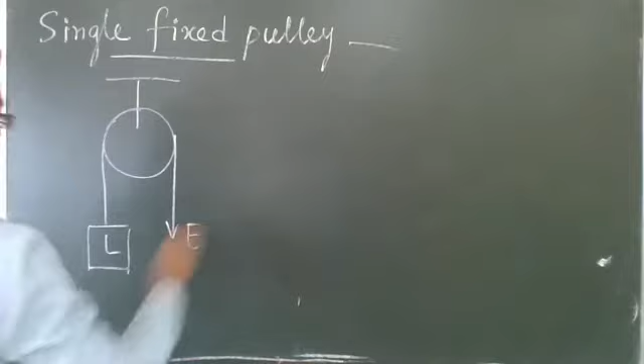Velocity ratio and mechanical advantage will be the same, that is 1. And when will they be equal? When it is ideal: single fixed pulley. Single fixed pulley. So on this side load is there, and on the other side effort is there. Okay. So I told that here there will be some tension, and the same tension will come to the other side because there is no friction.

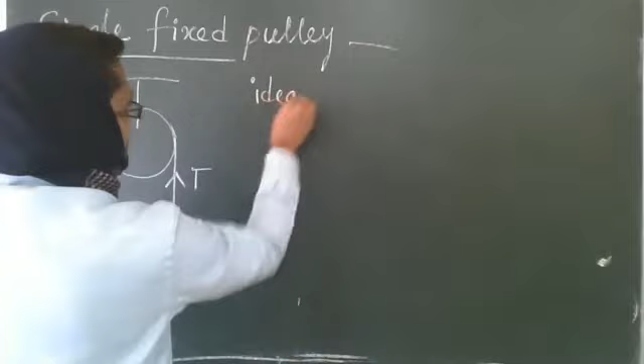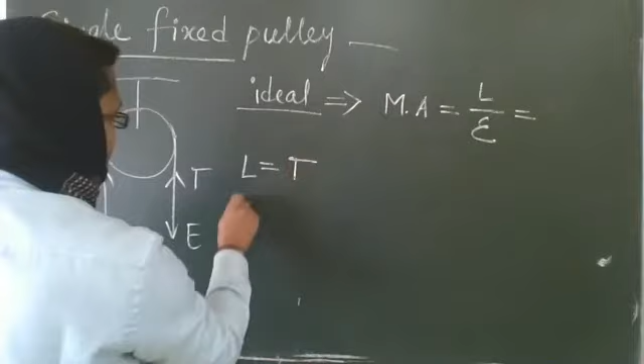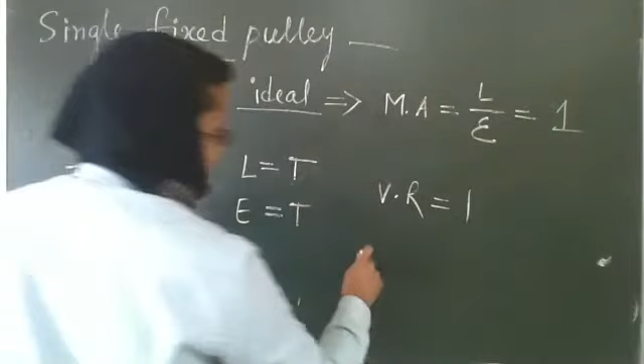For the ideal case, mechanical advantage will be equal to load by effort, and here load and effort both are equal. Load will be balanced by T, the tension. Effort will also be balanced by tension because there is no friction, and it will be 1. For the ideal case, velocity ratio will also be 1. But if it is not ideal, then velocity ratio will remain the same, 1, but mechanical advantage will be less than 1.

If you are asked that the displacement of the load point is 2 centimeters, what will be the displacement of the effort point? That will also be 2 centimeters because velocity ratio will be 1. Okay. Clear?

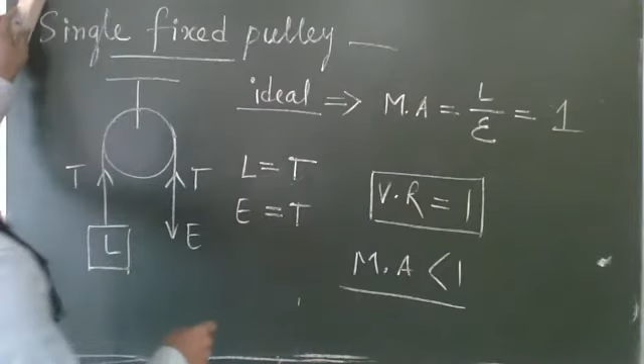Yes, sir. Okay. Now come to the single movable pulley. In a single movable pulley, what will happen? The axle, or the axis about which the pulley is rotating, that axis will also move. It will go up, it will go down. Okay. So single movable pulley. Here one side it is fixed. Here one pulley is there. And on the other side we'll put some effort, and here one load is there. So this is a single movable pulley.

When we apply effort, then this pulley will also go up. That means if this pulley is not massless, then we have to apply an amount of force which will bring both the load and this pulley up. Excuse me, sir. How can the pulley be massless? Yeah, it is the ideal case. In the ideal case, we take this pulley massless, but in the real case, there is mass. For that reason, mechanical advantage will be less.

Sir, is the ideal case real, or is it fiction? Means it is not there in real? In the ideal case, there is no friction, there is no mass of this pulley. In the real case, friction is there and the mass of the pulley is also there. Sir, my question is, does this ideal case exist in the real world or not? No, you all know that an ideal thing does not exist. We just assume it to make the calculation easy. That's what I was asking. Okay. So ideal does not exist.

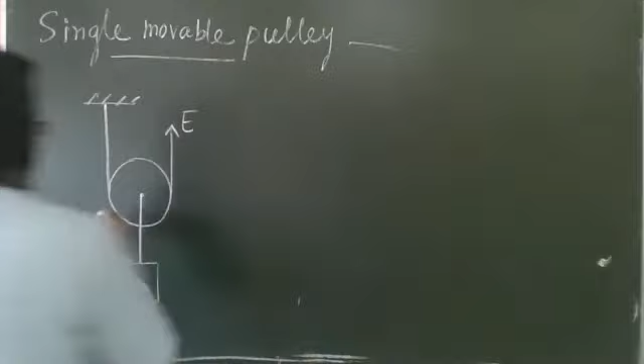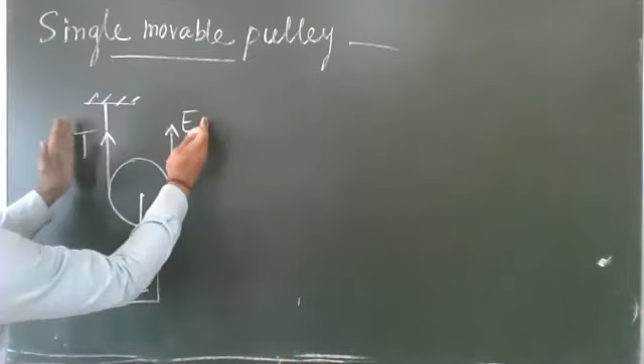So here when we apply some effort, again the same thing, one tension will act in the opposite direction. And the same tension will go to the other side of the string, in the opposite direction, T. Now this tension and this effort, which will be equal to tension, these two forces will bring the load up. So here the load is balanced by two equal forces, because there is no friction. So load will be equal to 2T.

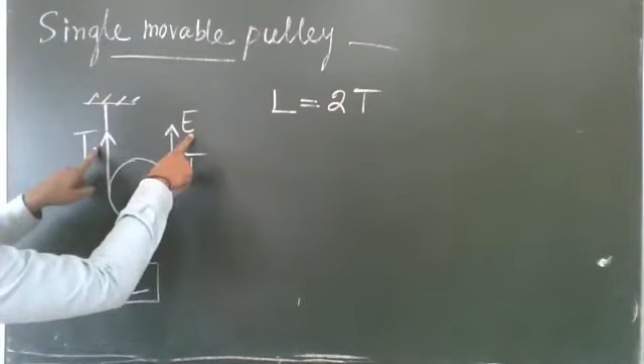Is it okay or not? Sir, once again, repeat it. This effort and this tension are in the upward direction. These two things will bring the load up. So we can write that load equals tension plus effort. But effort is equal to tension here. When we put some effort, one tension will be generated in that string, and they will be equal. Effort and tension will always be equal. And this tension will go to the other side with the same amount when there is no friction. So in the ideal case, load will be equal to this tension plus effort. Clear?

Sir, how is this tension becoming equal to effort? Tension, I told, comes from elasticity. Like a spring, if you put some force on the spring and release it, the spring will go back. Because of what? Because there is some internal force. This tension is the internal force which comes inside the string when we pull or put some effort on one end.

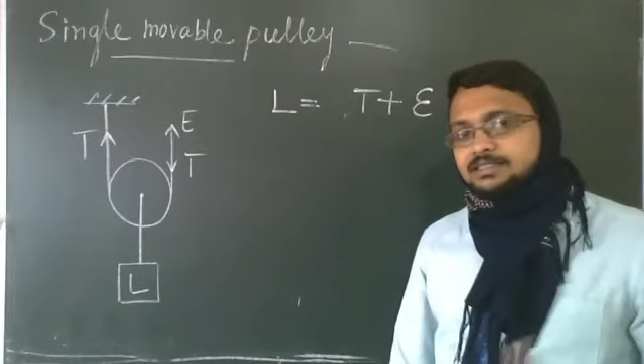Sir, there is no exception? Is tension always equal to effort? Tension will be equal to effort. In class 11, we also do some numericals. There also we will take tension equal to effort. Okay.

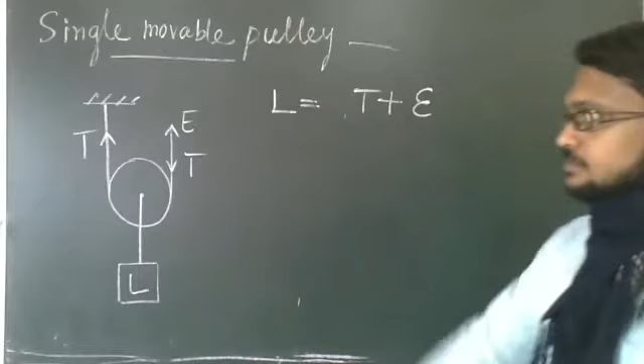Okay. Yes, sir. And this tension, there is an exception for this one because it is coming over the pulley. If the pulley is frictionless, then this tension will be equal to this one. Otherwise, for this part, there will be some less value. So here load equals tension plus effort, because tension and effort both are taking the load up. Now effort equals tension.

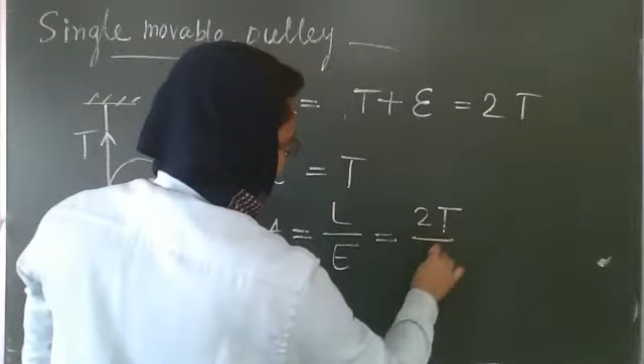Okay, that you understood automatically. Effort is equal to tension. This tension comes inside the string because of elasticity. So load will be 2T. So mechanical advantage, again, this is the ideal case. Mechanical advantage is load by effort, 2T by T. That is 2. Clear? Mechanical advantage is 2. Clear?

Clear? Reply. Yes. Sir, I did not understand. If you could repeat it once again. Load by effort, I do not understand. Yes?

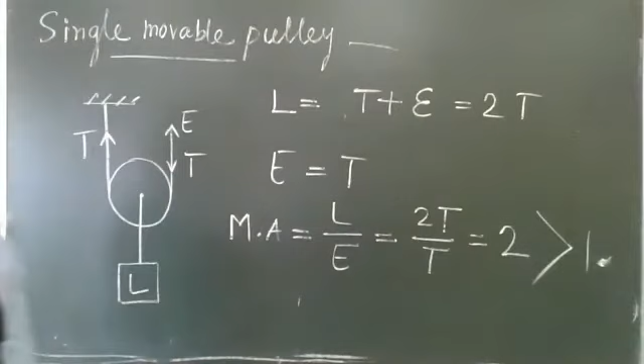Effort equals load by 2. Mechanical advantage is equal to load by effort. Load is 2T, effort is T, that is equal to 2. Okay, greater than 1. So it will act as what? Force multiplier. Mechanical advantage greater than 1. So a single movable pulley acts as a force multiplier. Clear?

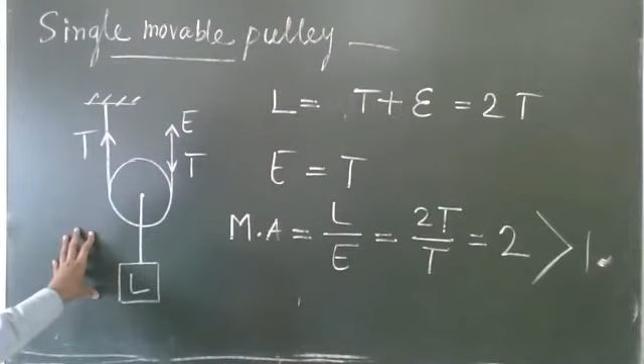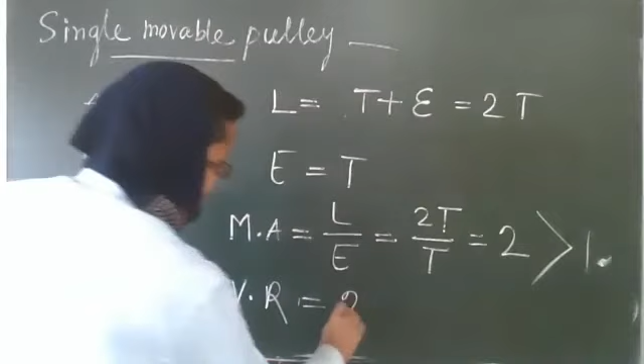Yes, sir. Clear. Now velocity ratio. For the ideal case, velocity ratio is equal to mechanical advantage. This will be 2, and this is 2 always for a single movable pulley. But if it is not ideal, then mechanical advantage will be less than 2. But velocity ratio will remain the same, 2. Okay? Clear?

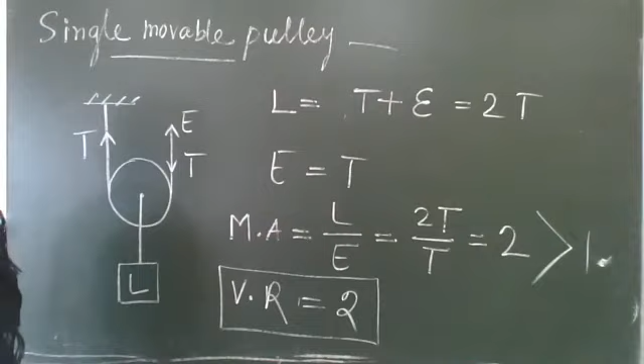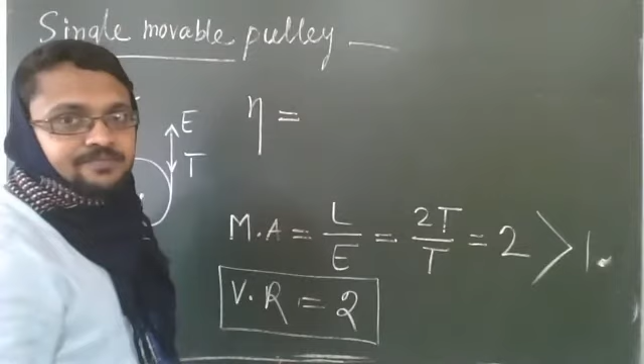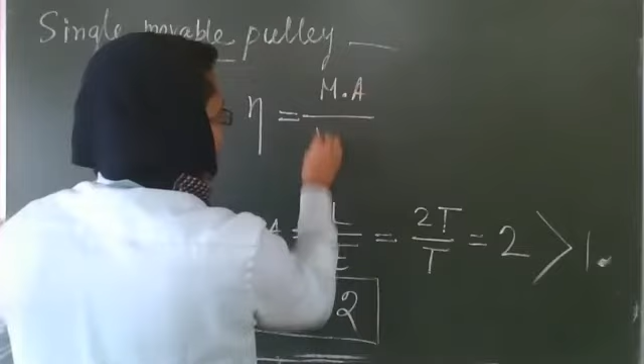Yes, sir. Now come to efficiency. Tell me, what will you get for efficiency? Efficiency, eta. Efficiency equal to what? Load by effort? No, in terms of mechanical advantage and velocity ratio. Mechanical advantage by velocity ratio, MA by VR. MA 2, VR 2, equal to 1.

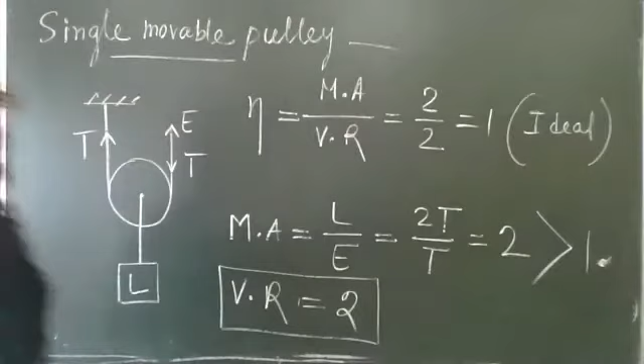Again, this is for ideal, but for an actual single movable pulley, eta will be less than 1. That means mechanical advantage will be less than 2 because of what? Two things again. One is friction in the pulley and the axle. And another point is we have to take the mass of the pulley also up. So there is some mass of the pulley.

Sir, if we are applying the force to pull that pulley also up, then how will it act as a force multiplier? This is a practical question: we are applying the force to move that pulley up and that weight also up. Then how is that machine acting as a force multiplier?

Using this thing, we can take more mass up. Whatever effort you are applying, you can take a weight up more than the effort. For that reason, it is a force multiplier. Oh, okay, sir. We are applying a small amount of effort, but we are picking up more weight. More weight means what? Force multiplier. Okay, sir.

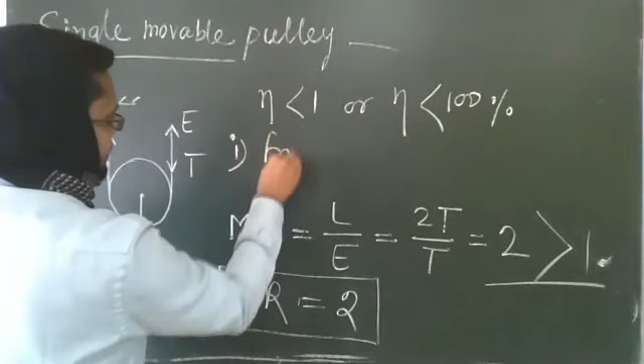So these are the few things. Velocity ratio equals 2 in the case of a single movable pulley. You can get numericals, and remember those 2 points. Why, in a real or actual single movable pulley, is eta less than 1 or less than 100%? Two points. One is friction present in the pulley and axle, and second, we have to pick the weight of the pulley in the upward direction.

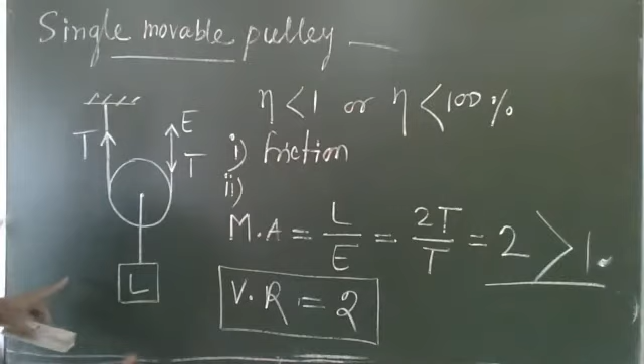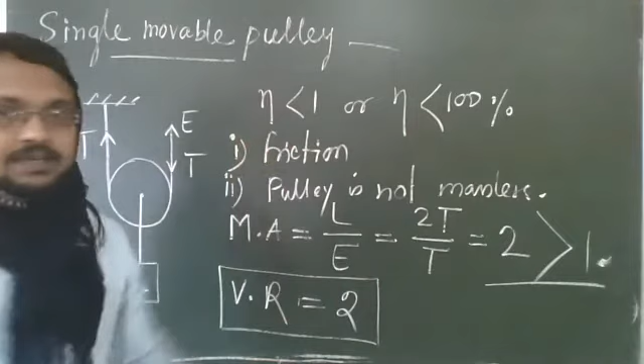Okay, the pulley is not massless. Pulley is not massless means we have to take the pulley and load both up. For that reason, eta will be less than 1. Okay, these are the 2 main points. After that, you will convert it into a sentence. Okay, fine.

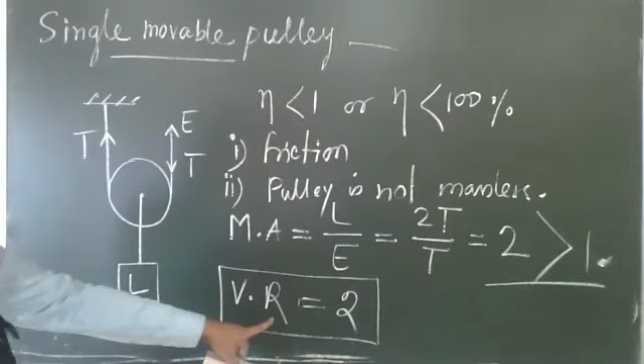Yes. Now you can get numericals from velocity ratio, mainly from velocity ratio. Mechanical advantage also you can get. Okay, I am giving. So when it is mentioned single movable pulley, you will automatically understand that velocity ratio equals 2.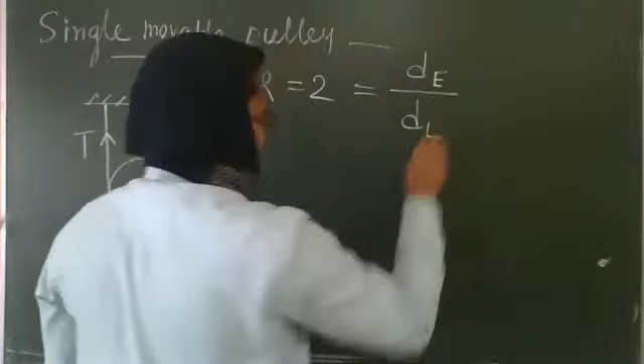Velocity ratio means what? Velocity ratio means the number of pulleys, in terms of displacement: distance moved by the effort by distance moved by the load, DE by DL. So DE by DL, okay.

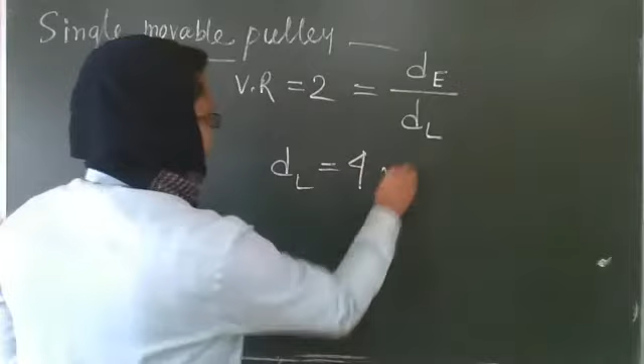Suppose it is given the load point is moving by a distance. Suppose DL is given, 4 meter. What will be the displacement of the effort point? You can find it. DL is 4, so it will be 8 meter. Don't forget to write the unit. 8 meter.

One example of this kind of pulley is in some big shops. You have seen, I hope, there is a shutter in front of the door, and beside that shutter there is a chain. They pull that chain quick, and the shutter goes up slowly. Yes, sir, I've seen. They use one handle also to rotate, and the shutter goes up slowly.

That means the load is moving slowly, but the effort point is coming down very fast. DE is more than DL in that case. For that reason, we can pick up the heavy shutter easily. Understood? Yes, sir.

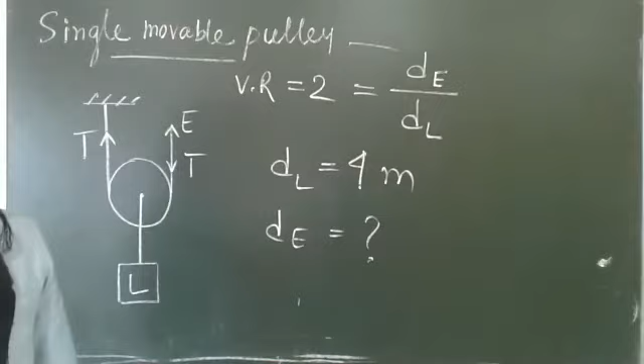Means the effort is acting more on the body, sir? Like due to the pulley, the effort is becoming more? Due to the pulley, effort is not more. We pull it easily; we are not putting too much effort. Oh, the effort becomes less. The effort point displacement is more. Oh, okay.

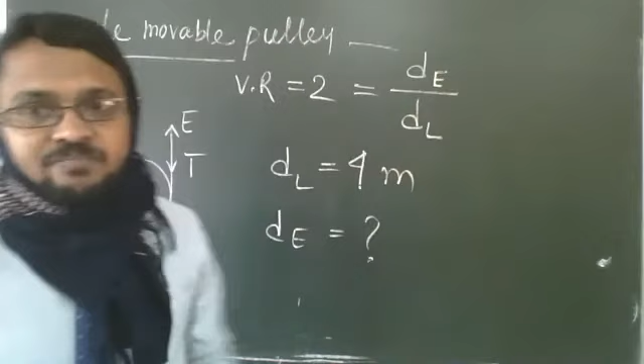Mechanical advantage equals load by effort. We are taking a heavy load by putting a small amount of effort, and we pick the heavy shutter up. One pulley is there inside that shutter. Clear? Okay, sir.

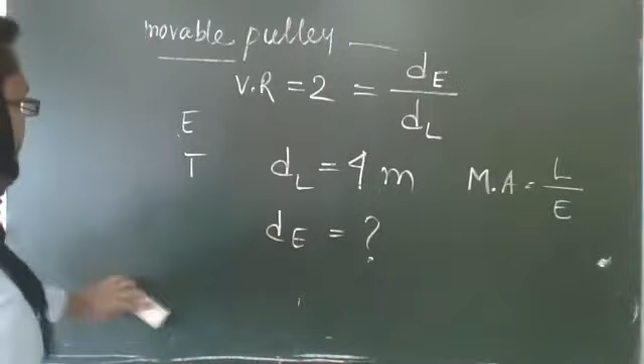Next I am going to the last part, the block and tackle system: how to draw a diagram, how to find velocity ratio, then mechanical advantage, efficiency, load, effort. So here we will see using an example. Suppose three pulleys are there, and you are asked to draw the block and tackle system.

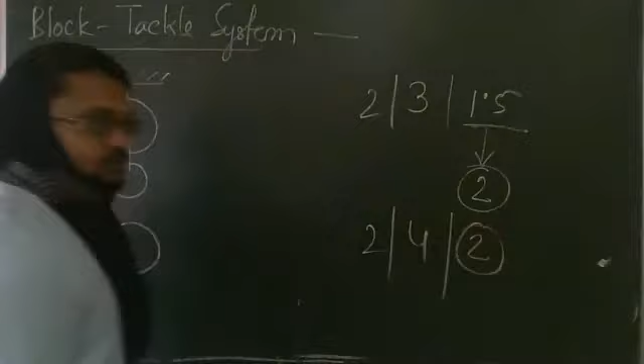How to draw? 3 means you will divide in 2 equal parts and get 1.5. Then you take the next whole number, that is 2. So 2 pulleys will be in the upper part and 1 pulley in the lower part. More pulleys will be in the upper part. If it is 4, dividing equally gives a whole number, 2, so 2 in the upper part and 2 in the lower part.

Now how to put the string? From here you will start, then it will go down, then go up like this, and here it will end. This will be the load, this will be the effort, and this is tension here. Sir, that down string is attached to the down pulley? Yes, this one goes this way, then down, up, then into the down pulley.

The hook will be touched here. 2 hooks are there, one with the down pulley, another with the upper pulley, but here we attach the string to the down one, not the upper. This string will take this pulley up. Okay, sir. So here how many tensions? 3 tensions will be there for the load: this, this, and this.

Because of what? This tension will be balanced by effort. And these 3 tensions, this, this, and this, in the 3 strings. One is here, another is here, and another is here. 3 tensions. These 3 tensions will take the load up. So load means 3T. And effort means T.

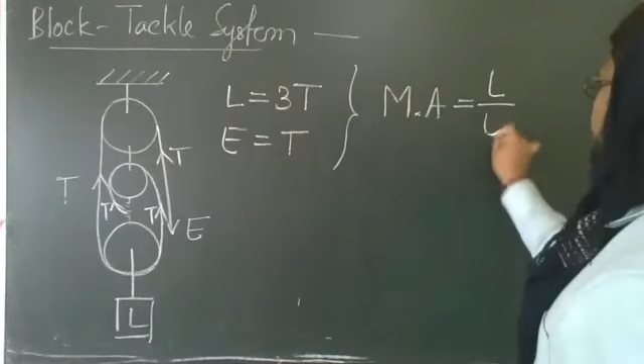This is for the ideal case. For that reason, the same amount of tension is transferring to each point in the string. From this, mechanical advantage for the ideal case, again and again I am telling, mechanical advantage is load by effort, 3T by T, that will be 3. For the ideal case, velocity ratio equal to mechanical advantage equal to 3.

Now, if this diagram is given and VR is not given, then how to write VR? If this diagram is given, then VR is equal to, this is only true for VR, number of these pulleys. Here number of pulleys is 3. So VR will be 3. This is only true for VR, not for MA. MA is 3 because it is an ideal machine.

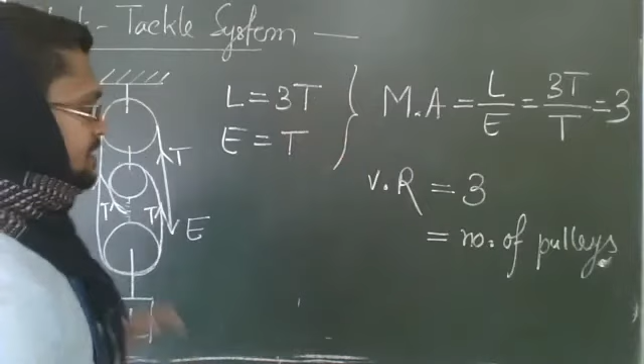If it is not an ideal machine, then MA will be less than VR. This is 3 for the ideal case. MA less than VR is for the actual case or non-ideal case or real case. Sir, if it is an ideal pulley, then we can write MA is equal to number of pulleys. Yes, if it is ideal. Otherwise, VR is always equal to number of pulleys. And MA equals VR when it is ideal, and MA will be less than VR if it is not ideal. Clear?

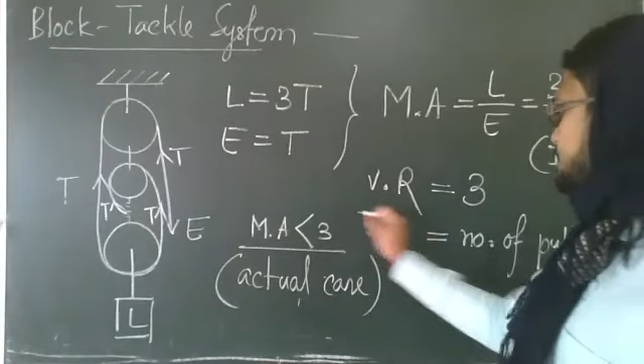Okay, sir. Now you can get this kind of question. Suppose VR is given, diagram is not given. From the VR, you will understand how many pulleys there will be. If VR is given as 3, you will understand that there are 3 pulleys. After that, you will be asked to draw the block and tackle system using 3 pulleys. After that, suppose efficiency of the machine is given, suppose efficiency equal to 0.8 or 80%.

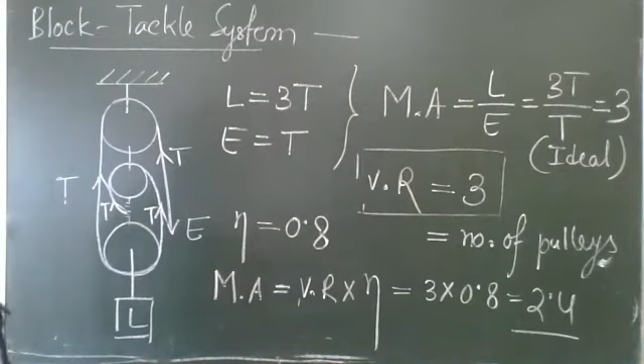And now how to find MA? MA is equal to VR into eta. That is 3 into 0.8, right? Sir, efficiency will be given? Efficiency will be given, otherwise how to find MA if it is not ideal. If it is mentioned that the block and tackle system is ideal, then only you can write MA equal to VR, otherwise you cannot write. Understood? Okay, sir.

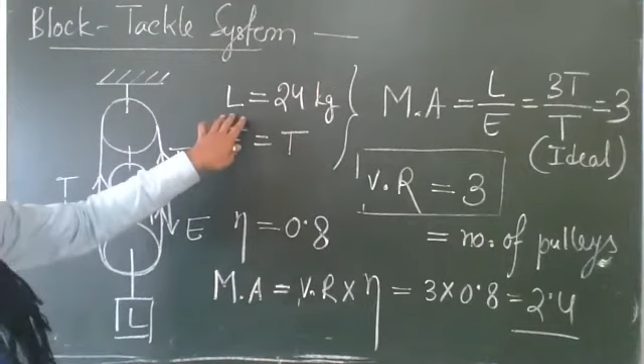Now you are getting MA 2.4. After that, suppose load is given. Then how much effort will be applied to pick the load up? MA equals load by effort. Suppose load is 24 Newton. Sometimes you will get load given as 24 kg. How much effort will be applied to pick a 24 kg load up? Then you will understand that this is 24 kgf. Load is force, so the unit will be Newton or kgf.

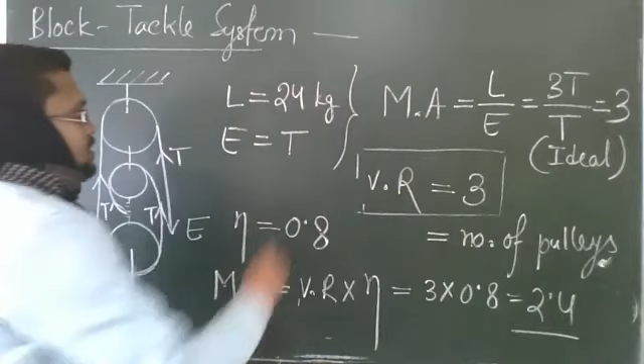So how much effort will be applied? Mechanical advantage is this, load is this. Put the values here. Mechanical advantage 2.4 equal to load 24 by effort. So effort equals 24 by 2.4. So it will be 10 Newton. Understood?

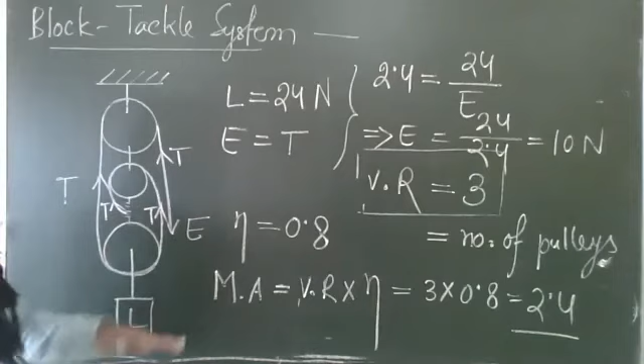I didn't understand, sir. Could you please explain it once more? I didn't understand the last part. Okay, I'm doing it from the beginning using 3 pulleys. Okay.

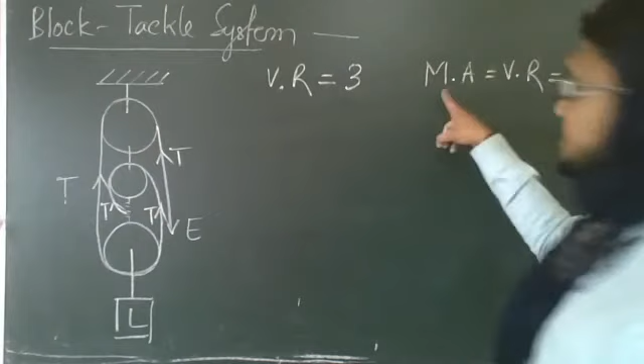I'm doing it step by step again. Okay, sir. You can get this kind of question. Diagram is given. If diagram is given using 3 pulleys, then first of all you will understand VR equal to 3. Next thing, if in question it is mentioned that it is ideal machine, then you will take that MA equal to VR equal to 3. Otherwise, you will not take this one. If it is mentioned ideal, then only you will take.

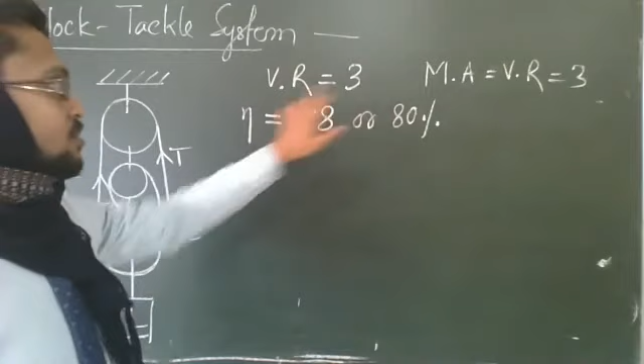Next, if it is not ideal, then in question one more value will be given, that is efficiency. Suppose efficiency is given here 0.8, or you can get it this way, 80%. 80% means 0.8, 80 by 100. In any way, eta equal to 0.8 will be given. VR is 3. When you are seeing eta equal to 0.8, you will automatically understand that the machine is not ideal, because eta is less than 1.

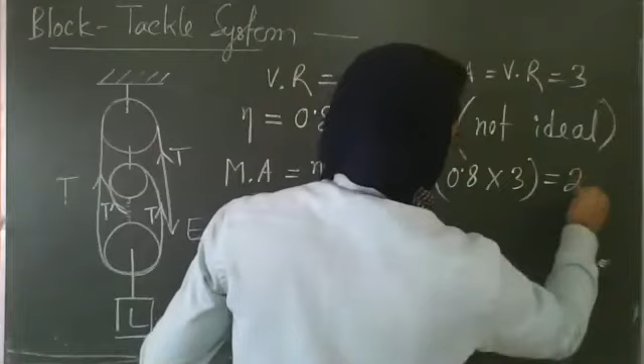Now how to find MA? If VR will not be given, if the diagram is given, eta will be given. Then MA equal to eta into VR. The formula is there, eta equal to MA by VR, that we had done yesterday. Now eta is 0.8 into 3, you will get 2.4. This is MA. Clear?

After that, suppose value of load is given. How much? 24 Newton. You are asked what will be the effort to pick this load up. So mechanical advantage equal to load by effort. You all know now. Now load is 24 by effort. So effort will be 24 by 2.4 Newton, that is 10 Newton. Understood now? Yes, sir, I understood properly.

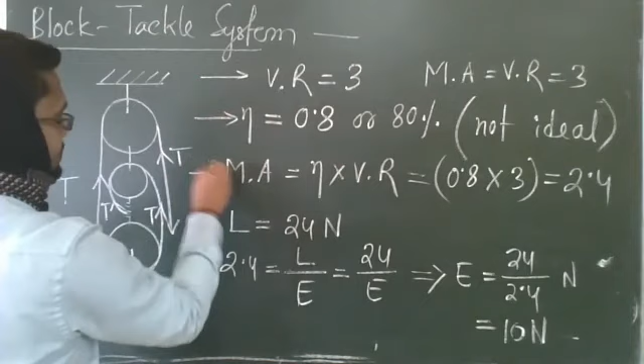Yes, these are different steps. So sequentially you will go. If the diagram is given, velocity ratio will not be given. If velocity ratio is given, then diagram will not be given, and you will be asked to draw the block and tackle system. So if velocity ratio is 3, you will understand that there are 3 pulleys. Clear?

Sir, if diagram is given, we just have to check the number of T? Will the number of T be given or do we have to draw it? T means tension, like you did 3T by T, that's how we get the velocity ratio. T will not be given in the diagram, we have to find it ourselves. Yes, 3 pulley means VR is 3. Simple. Oh, we don't have to derive like you did? No. 3 pulley means VR 3. Just single line.

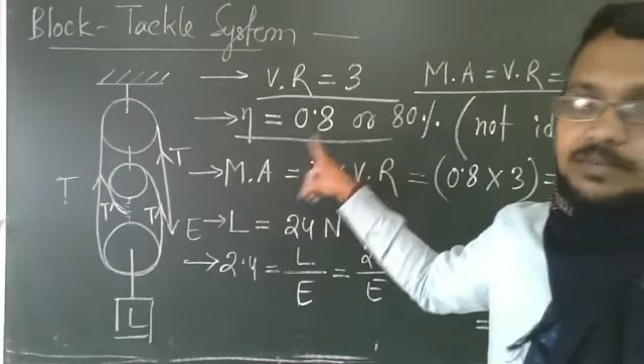Okay, sir. If it is mentioned that the machine is ideal, then mechanical advantage also 3. After that, if eta is given and eta is less than 1, then mechanical advantage should not be equal to 3. Then mechanical advantage equal to eta into VR. Yes, sir. Now properly clear. If it is ideal, then eta equal to 1. If eta is less than 1, mechanical advantage will be eta into VR. So this will be the value.

After that, suppose load value is given, what will be the effort value? Suppose effort value is given, you are asked how much load you can pick up using this block and tackle system. Then the same formula you will use. And one more thing we have to keep in mind, 24 kg is equal to 24 kgf, because load and effort are forces. So when you are writing load by effort, here you will write 24 kgf.

Okay, sir. Here I have taken 24 Newton. If the weight is given 24 kg, then when you are writing load, it will be 24 kgf. And our last answer should be in Newton or in kgf? You can write kgf or Newton. If you want to write it in Newton, multiply it by 10, the value of g. Otherwise, leave it here in kgf. No problem.

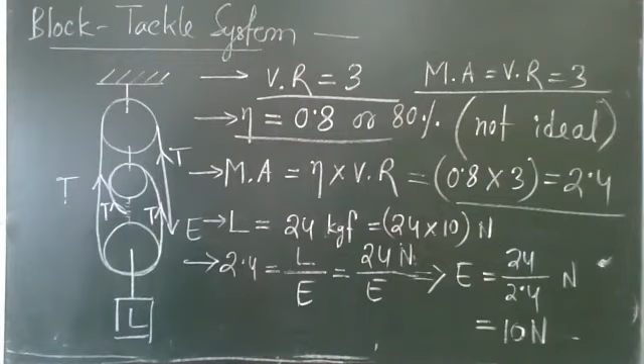Then it should be 100, meaning the last answer, if you multiply it by 10. I have taken kgf here. Initially it was Newton, 24 Newton. The values are different. 24 kgf and 24 Newton are not equal.

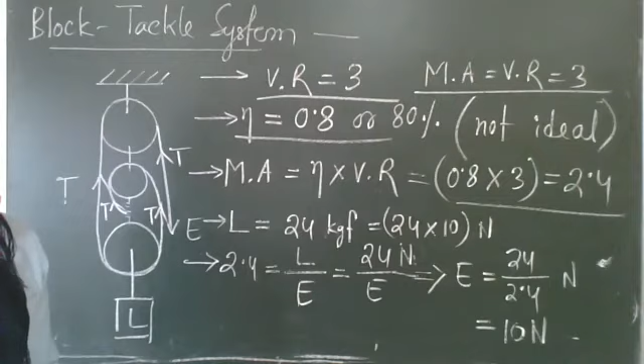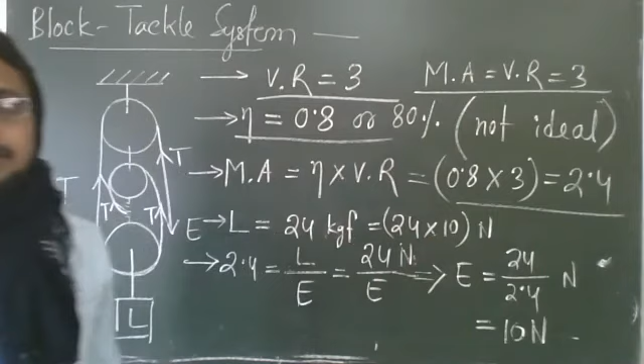Okay. Then how are we taking it? kgf and Newton are units of force, but they are not the same. Oh. Then we are changing kgf to Newton without multiplying by 10. When you are changing kgf into Newton, you have to multiply by 10. We have to multiply it by 10, but there too you have taken 24 only. You didn't do 240 for the previous value.

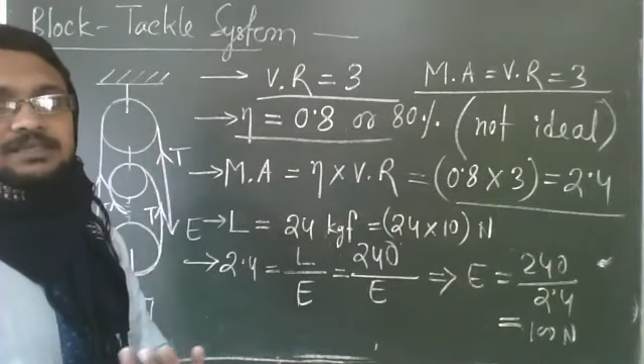Now it will be 100. Initially I had written 24 Newton here. I had not taken kgf. Now I have taken kgf to explain it. Now it will be 240 by 2.4, 100 Newton. Newton and kgf are different things. They are units of force. You have read this in class 9 in the gravitation chapter. Whatever we are taking, that only we have to do.

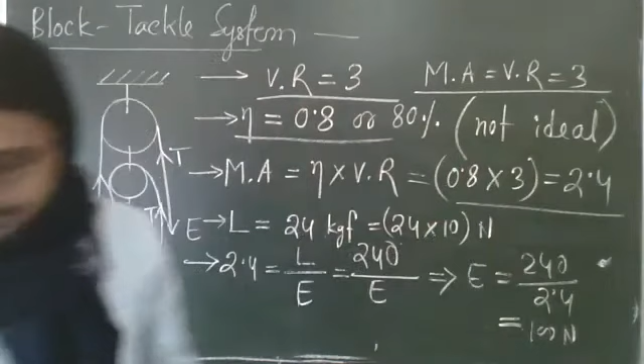Last answer. Okay. 24 kgf, put 24 kg here. If you want to convert it into Newton, convert it by multiplying by 10. Otherwise, simply, load is 24 Newton, find effort, it will be in Newton. Okay, sir. That was one of the problems. Now it's clear. Okay, clear?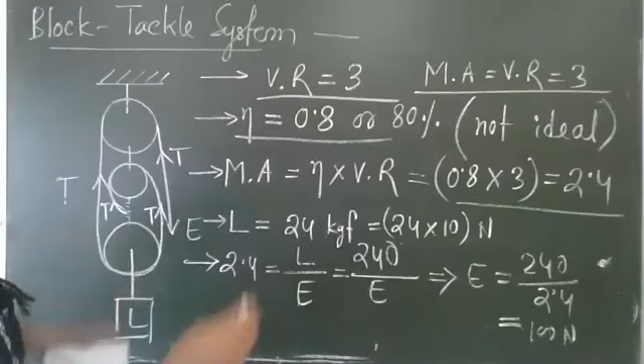You can get a direct short question, like suppose it is given an ideal block and tackle system. So velocity ratio will be 3, mechanical advantage 3. Ideal means mechanical advantage 3. Here again the load is given, suppose 24 Newton. What will be the effort?

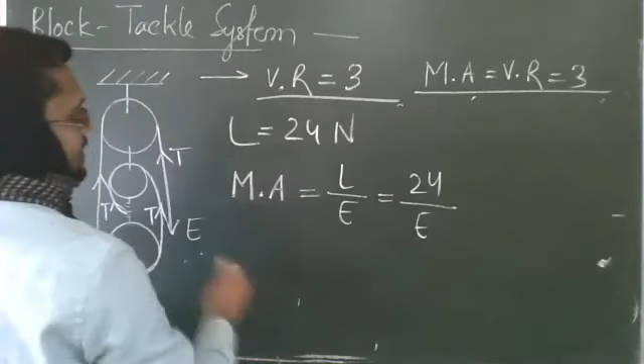So no need to do more steps now because mechanical advantage is 3. Mechanical advantage is load by effort. Load is 24, effort we have to find, and mechanical advantage here is 3. So effort will be 24 by 3, so 8 Newton. If it is ideal, then mechanical advantage will also be 3. Okay. Clear?

Yes, sir. Now suppose velocity ratio is 4. You are asked to draw the block and tackle system. When you are drawing the block and tackle system in your copy, remember, show the tension direction, show the effort direction, and show the load direction. This is in the downward direction. So show the effort direction, tension direction, load direction when you are asked to draw the diagram.

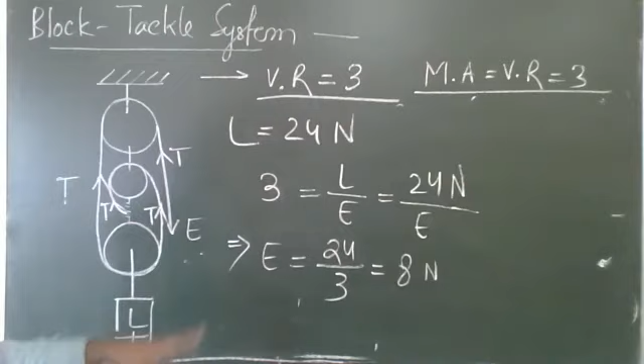So suppose now velocity ratio is 4. Just I'll show this and then finish. Velocity ratio is 4, and then Monday, and the next day exam from machine. Okay.

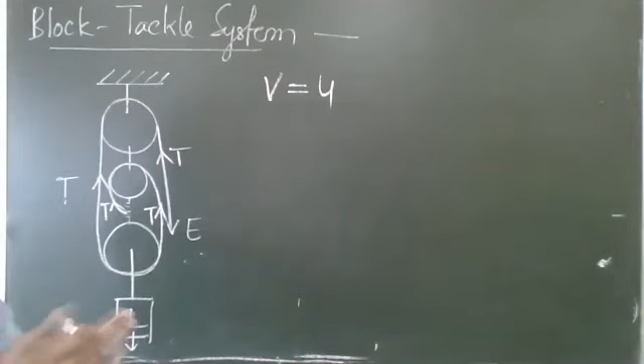Velocity ratio 4. You are asked to draw the block and tackle system. So 4 pulleys will be there. 4 pulleys means we can divide it easily by 2. So 2 up, 2 down. 2 up, here one string, and 2 down, here one, and here another. Load will be here, load in the downward direction. Give a string now, don't give a dotted line. Clear?

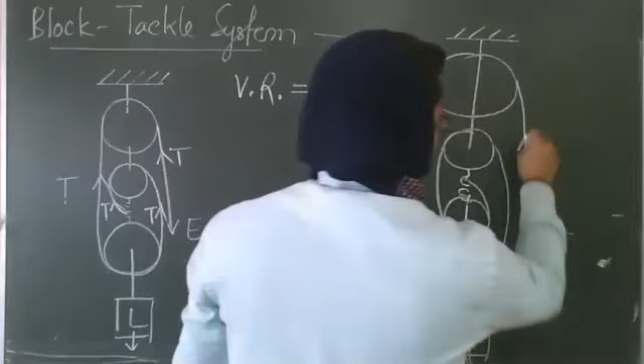Sir, in this type of question, is the diagram compulsory? Yes, the diagram is compulsory if you are asked to draw it. Then you will draw the diagram. Otherwise, no need to draw. If the diagram is given in the question and you are not asked to draw it, then you will not draw.

So this tension will balance this effort. This tension will come to the other part, this part. The same tension will go to this part also, and the same tension will go to this one also. So 4 tensions, 1, 2, 3, 4. So here load will be 4T, effort will be T, mechanical advantage will be 4 when it is ideal. Clear? Yes, sir, this is an ideal case. Clear? Yes, sir.

When you are drawing the diagram, keep in mind, show the tension direction, the effort direction, and the load direction. And don't give this kind of dotted line. Give a solid line.